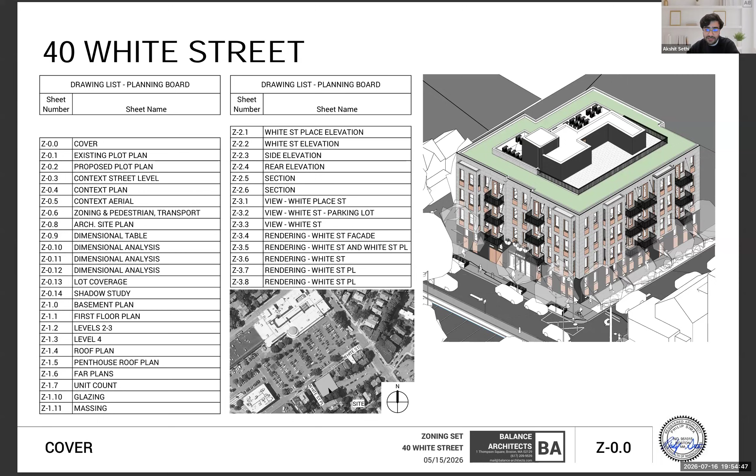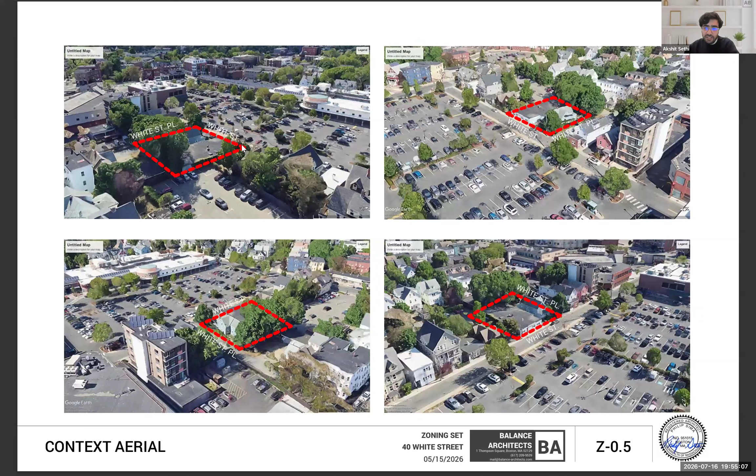Just showing you a couple of proposed plot plans we got from a civil, a few snapshots of the street, showing both 40 White Street and White Street Place. You can see the 2 existing buildings on 32-40 White Street right here. Just a quick aerial context of where the site sits, right opposite the shopping center. We're in the quarter-mile radius, and it's in MR4.

Just a quick discussion on the site plan. One of the biggest things we took away from UDC was we had the entry, the bike trash room, all the way over at White Street Place, but we worked with the abutters. They voiced their concerns, and we moved it over to White Street, which is much more accessible for delivery. So we have a huge, pretty sizable drop-off zone, a no parking area right at the edge of the site.

Also, another thing very important for us was to give as much green space as possible. So we have a sizable green patch on White Street Place, which is more of a private road - I think it's 20 feet wide. So that becomes like a nice feature for the street itself. We have 2 light wells towards the back, or the side yard facing 44 White Street. And then for bike and trash rooms, it's easily accessible for trash pickup days and for bike accessibility.

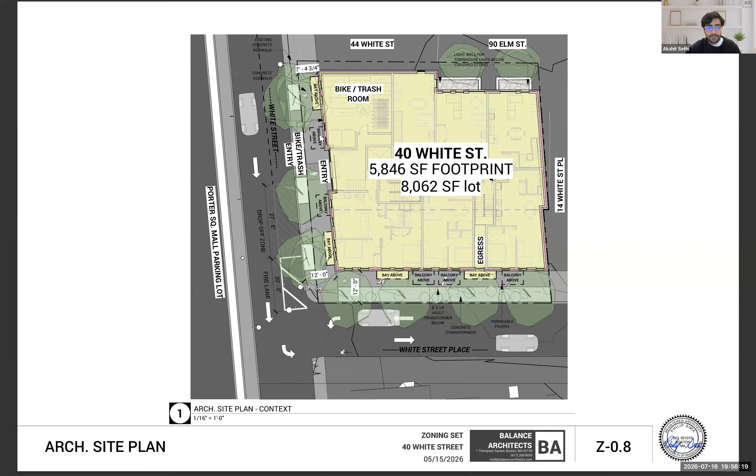I'll probably hop on more into the plans for detail. So hopping onto the first floor plan, as you can see, we have a lobby, accessible lobby. You walk up into the corridor, or you can use the elevator to access the upper units, which is technically the first floor. Picking up from 32 Webster, we've introduced a Group 2A unit, which is a 1-bedroom on the first floor. Also, we have 3 units towards the back, or the side yard - that's a townhouse that walks into the basement.

So these are 2 beds on the upper right corner, coupled with a 1 bed on the left side, which walks down to a 2 bed in the basement, which is 103, 104, and a 1 bed, which is 102. They have a shared light well to themselves.

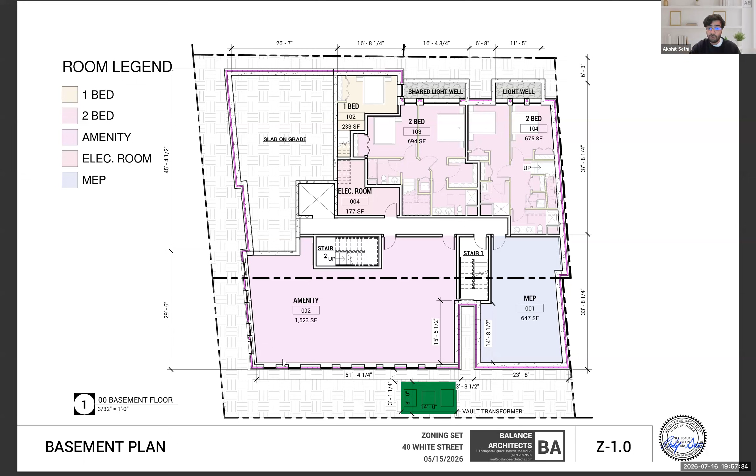We also have amenity spaces and MEP. Another important thing we picked up from the UDC was they suggested to put windows on the amenity side, so we have enough grade slope to have light and ventilation for that space. That was a great addition.

We have trash and bike room, as I said before, on White Street. Technically it's 30 bike spots. Given this is a much tighter, squarish site, we have a compliant 29 bikes according to zoning, and we have an extra bike spot within the equipment, the 2-rack equipment, and 2 dumpsters which access the entire building.

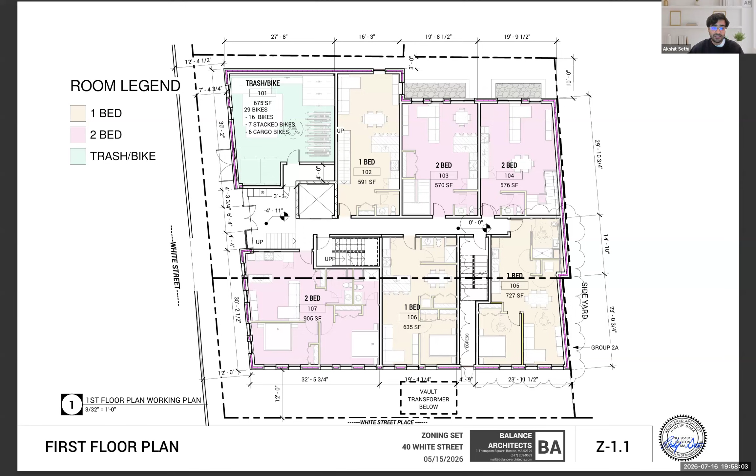Moving up, second and third floor are pretty much the same. The difference is the second floor has two more Group 2A units, 202 and 205. 202 is a one bed, and 205 is a studio. We've also tried to couple these with a lot of bays and balconies, so we have two bays on either facade of White Street and White Street Place, and a total of 15 balconies in the entire project, 5 on each floor. So every unit gets a bay and a balcony, or sometimes two bays or two balconies, giving them enough outdoor space.

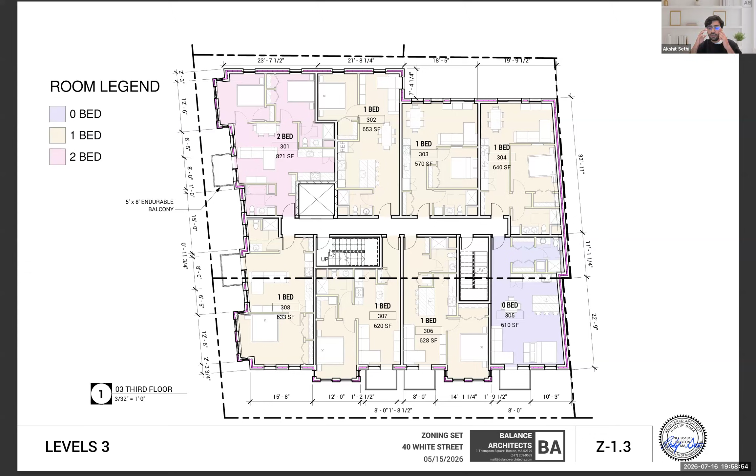The orientation changes a little bit, but the floor plate's the same. Where we start adding, we try to add two beds to every corner to maximize the view angles of the entire space. On the fourth floor, this is where we remove the studios.

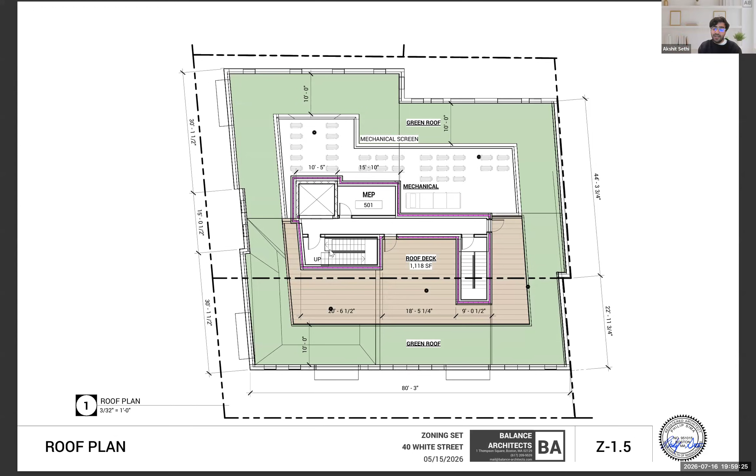We add mostly one beds and two beds facing White Street Place, and then we have an accessible roof with mechanical facing the backside so nobody can view it. We have a pretty sizable roof deck facing White Street Place and White Street. As we had spoken earlier, we are applying for a special permit.

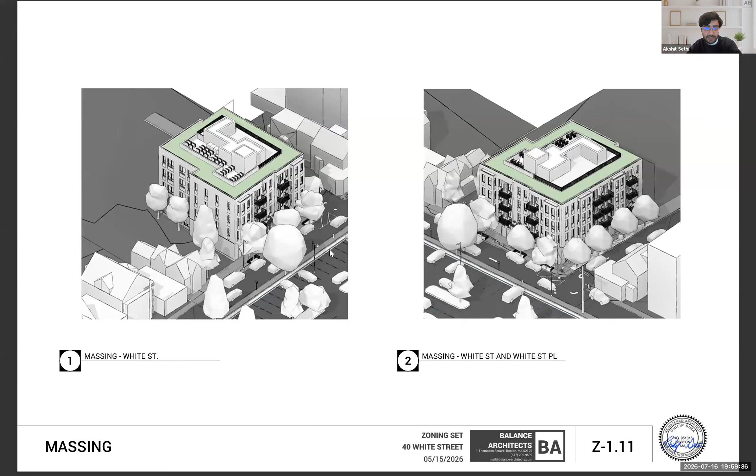So let me take you to a quick massing view of how it looks. For the White Street elevation, we coupled our windows with a wooden accent to keep a very nice and muted look throughout the entire project, which I'll show you in the renders below.

This is what White Street looks like when you're walking on it. We've got a lobby. On the left side, you have a bike and trash room facade, and on the right side, you can see those tiny windows at the bottom, which were recommended by the UDC to add for more light and wind ventilation for the amenity space in the basement.

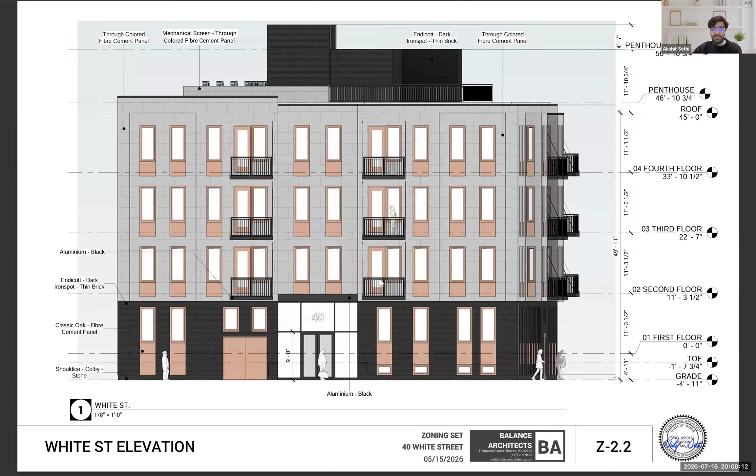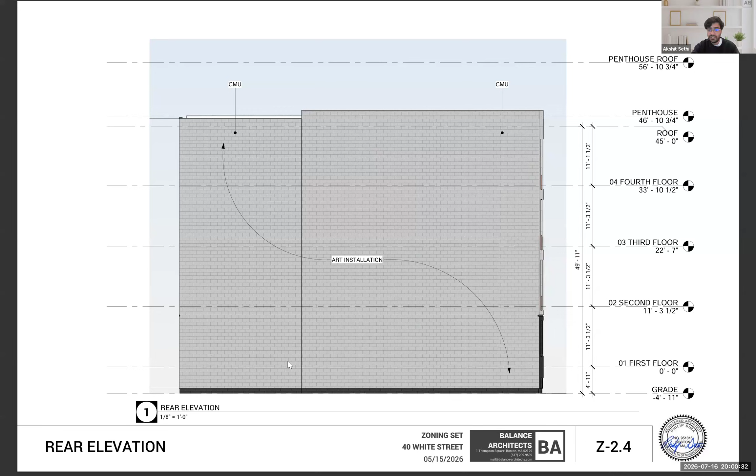This is going to be the side yard where we have those light wells for the townhouse units. We have a blank wall where we'll have an art installation that faces 14 White Street Place, which is the private side. This is a zero lot line property, so this goes right along the property line facing the other proposed construction.

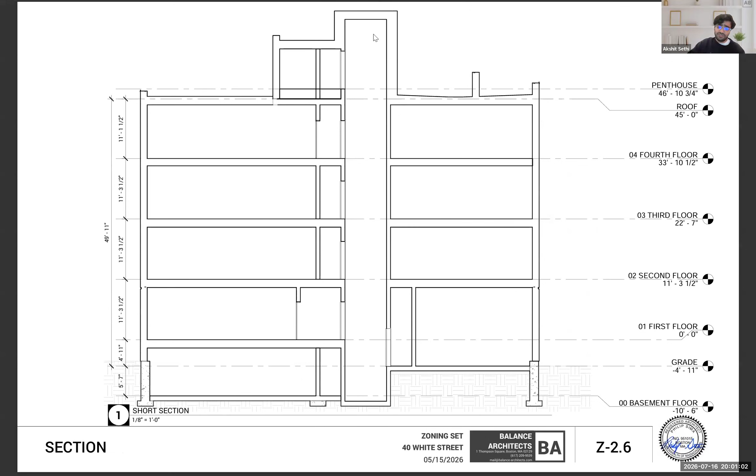For sections, we have our elevator going right up. So this exceeds the 10 feet, but this is also an accessible roof deck, which pushes our threshold a little bit higher. We need a bit more elevator space, because I think it's about 15 feet 6 inches for a standard elevator to have proper head height room.

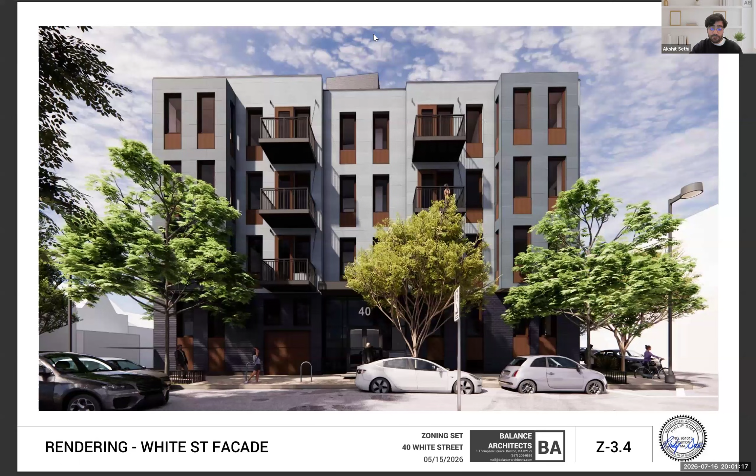So here are a few more views for the board to look at of how this project looks from both White Street and White Street Place. Ultimately, the UDC approved this option where we have a very nice solid brick base that creates the foundation and first floor, then it bleeds onto a nice two-tone, very light paneling on top, with the base having a much darker tone and the facade a much lighter tone, coupled with a more natural wooden finish on the entire project.

As you can see, working with a landscape team, we figured we meet the green score. I think we go higher than the open space required, with permeable pavers on the sidewalk and enough greenery on White Street Place, because that's more of a private way. We have our 3 trees planted on White Street.

So just showing you a couple more views. This is how White Street Place looks like. This is just to give you a comparison of the proposed construction on White Street Place, which I believe is 14 White Street Place. They face the wall with the art installation on it.

So wholly, this is 40 White Street for you.

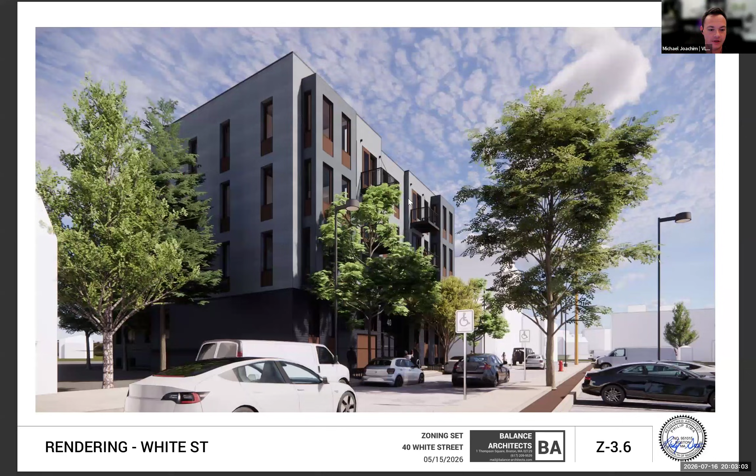A big part of our landscape plan is widening the streetscape along White Street from about 4 feet wide of concrete paving now to about 12 feet wide, with a 4 foot wide furnishing zone with permeable pavers, visitor bike parking racks, 3 new street trees, and then another 8 feet of concrete paving.

And then when we go down White Street Place, where there isn't a sidewalk now, we're proposing another 12-foot setback with concrete paving, street trees, and plantings. Thanks, Michael.

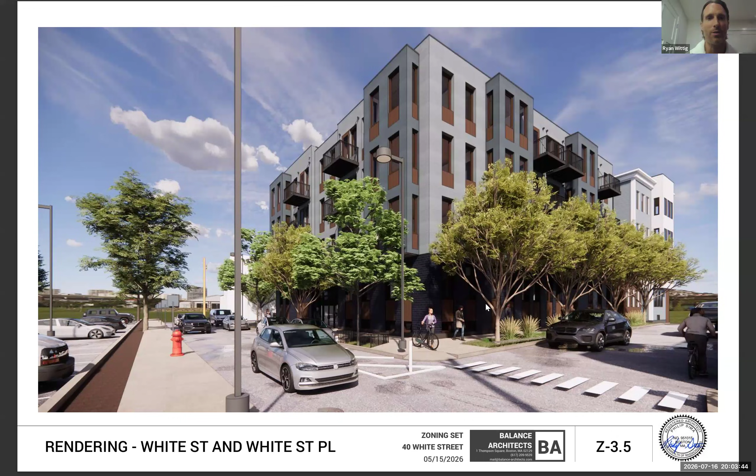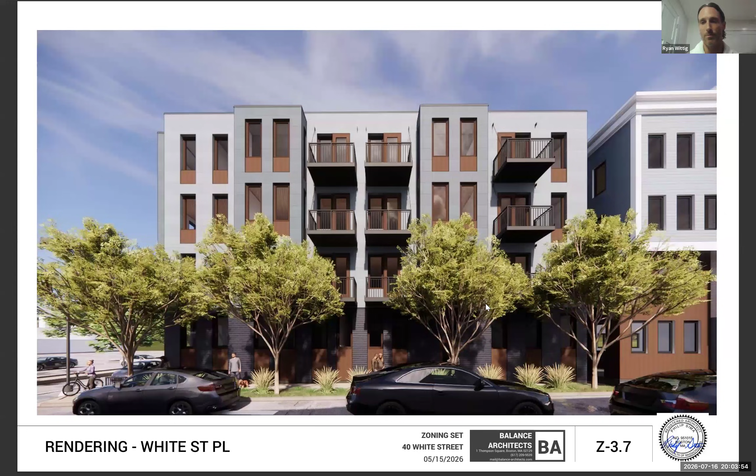I'm not sure if I mentioned this in the beginning, but we've upgraded all of our accessible units from Group 1 to Group 2A as a gesture to go above and beyond, which we most likely intend on making those the affordable units as well. So we've upgraded from the traditional accessible units to Group 2A.

If I have the opportunity, I would like to also show a couple more options that we had proposed to the UDC, just for the planning board to see how and why we came up to this final option, if that works, if that's okay with the team. Go for it, thank you.

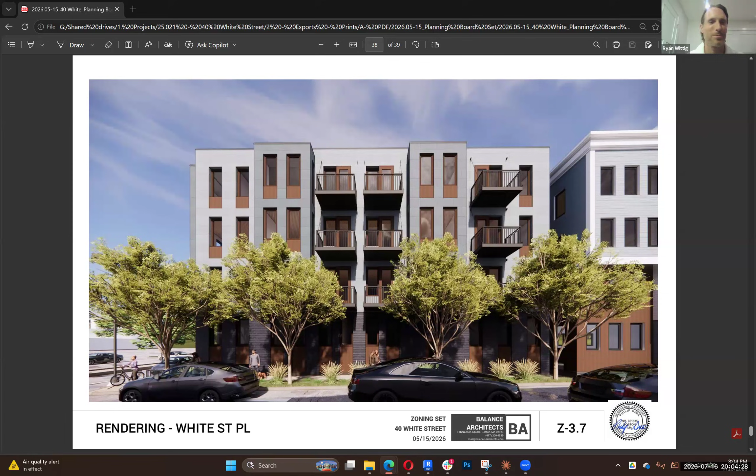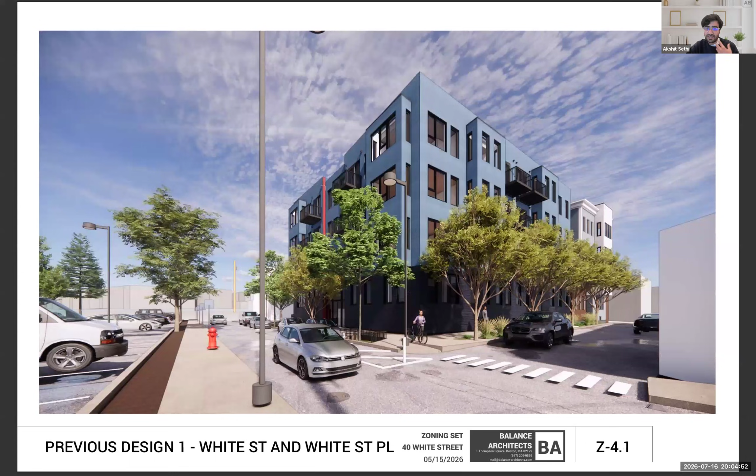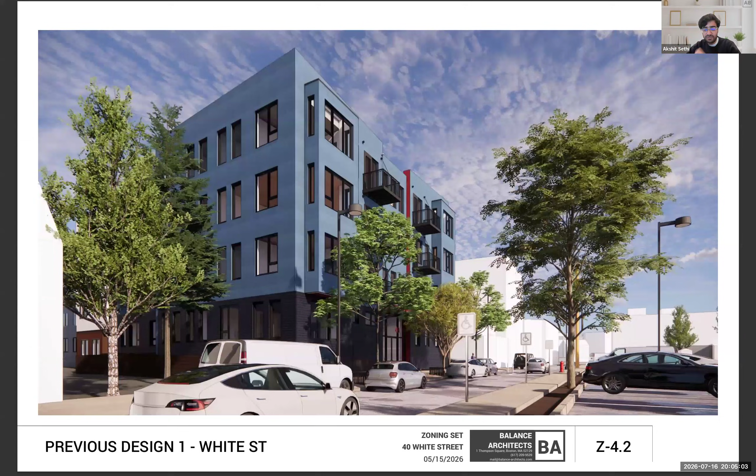As you saw, we have a much more two-tone panel that we went ahead with, which is what the UDC preferred. But circling back to our older design options, this one was more trying to give homage to what is there on site right now. This one didn't have windows for the basement amenity space, and had a more muted blue and red color scheme hinting towards the buildings on site, but still keeping that dark solid base to give it more oomph to the entire project, give a nice background and a datum line to it to separate the first floor from the upper floors.

I think that concludes our presentation. So we'll open it up to questions and comments from the board.

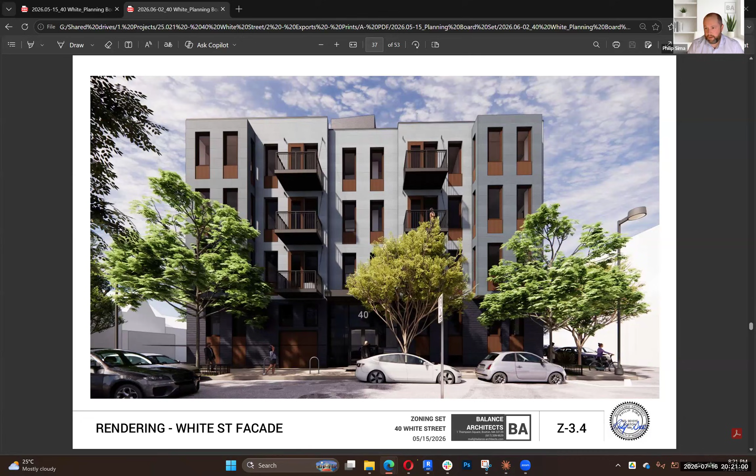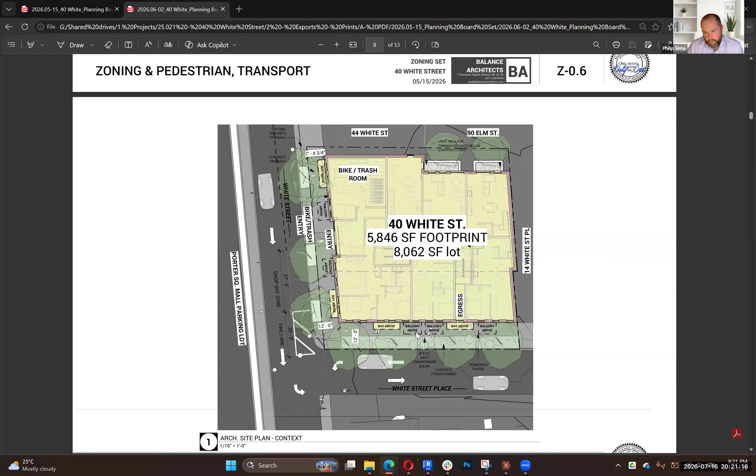I don't know if you can show on the site plan there. Take a look at that site plan. So it's showing on White Street Place. Actually, for some reason you can't really see it there, but that's the location of it.

To this point, we haven't been told that we have to do transformer changes. Whenever this happened on one of my buildings at 872 Broadway, the equipment for the underground transformer had a supply shortage during COVID, and that was really what was causing the switch. We haven't seen that recently, and we've installed two vaults on Prospect Street in the last month or so.

Great, thank you, I wasn't sure what the recent trend on that was. I also wanted to ask, I know sometimes with these medium scale buildings we've talked a little with applicants about the volume of packages people tend to receive these days. I raise that both about loading, which I think you've addressed already and which is Cambridge jurisdiction anyway, but also I don't see a space that looks like it's designed to be a dedicated mail or package room here, and maybe it's not necessary at this scale, but the foyer looks a little tight, and I was wondering if you'd given any thought to that operationally.

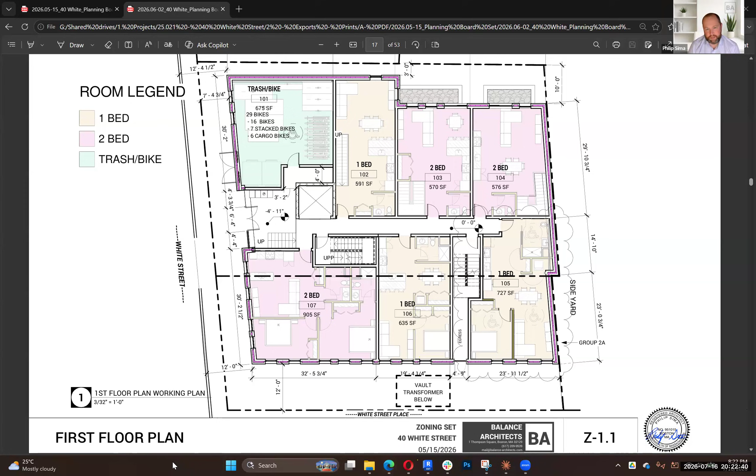Back to the transformer, I just was told that we have a work order for it, so a little progress on that. We're showing automated storage packages, if you look at the entry door, those kind of boxes. Yeah, I did note that. I mean, it's there.

We would like to, I mean that bike room is very tight. Thankfully we just got over 29 bike units, that's the most rational place to put it. It's hard with the stairs and the elevator over there. So we're hoping that if you have a smart automated system that you can unlock with your phone, that's going to take the majority of stuff.

In terms of drop off, like Akshit mentioned, we have a very large drop off area, and the corner is close to parking, so moving trucks can actually probably extend into that. There's really sufficient space for deliveries, and packages is certainly a concern because people get things delivered all the time, but we're trying to address that through the storage locker, which has multiple sizes for how you can store packages. Thank you.

Did you re-raise, or you? Yes, Mr. Chair, I do have a question for the applicant team on a separate matter.

I noted that this is in regards to the secondary egress from the waste and bicycle room. I understand that the movable garbage bins may obstruct the secondary exit, and I also recognize that users would be directed towards the primary exit. So I want to better understand how this is a code compliant, unobstructed secondary means of egress guaranteed, not just operationally promised. This is for the applicant team.

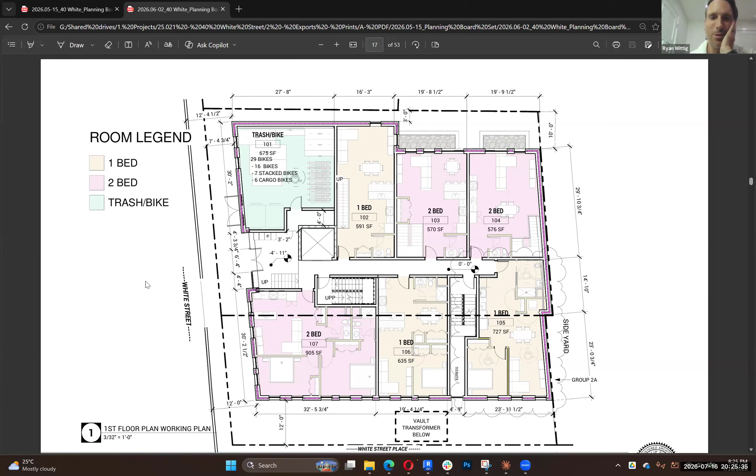Before we do those, I was hoping we could go through the floor plans, first floor through the fourth floor, and just look at these. I'm just wondering—you don't need to be an architect to look at this and see.

I just want to make sure I understand. I'm trying to get clarity. I'm trying to get clear if the board's request is for us to eliminate units so that we can accommodate 3 bedrooms. So you're saying the board is requiring or requesting that we eliminate units to accommodate the 3 bedroom requirement.

That would be a proposal. We've done that before with other applicants. Yeah, fair enough. So if we don't bring any 3 bedroom units, what I'm hearing from the board is it'll not be voted on—it'll be rejected. I think it might be a little bit more of an uphill battle for you. Yeah, that we've certainly done for other developers. That is absolutely something this board has a practice of requesting and asking for.

The two special permits we're requesting are a special permit for multifamily housing and a special permit for a head house for accessible access to the roof deck. That's all we're asking for. We're not asking for anything else. So I just find it—if the city wants and is going to mandate 3 bedroom housing, it should mandate 3 bedroom housing in the zoning code. We're complying with the ordinance.

The fun thing is, we're the planning board and we have quite a bit of discretion to ask for things as it relates to the special permits you're requesting, that relate to the zoning and housing needs of the city. It's not the first time we've done this, either for you or other people, and the planning board is well within its discretion to ask you to have a potential redesign so we can consider it.